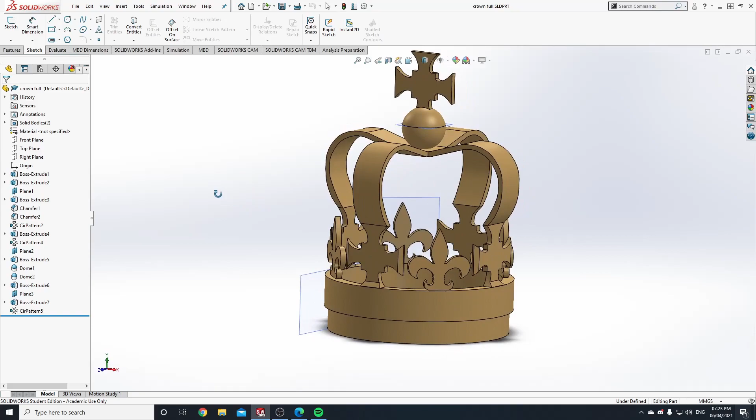What's happening, everybody? My name is DMan, and this is a Solidworks tutorial to show you how I made this model, which is my final big, impressive, if you will, 3D printed crown, and I'm going to show you how I make it in Solidworks.

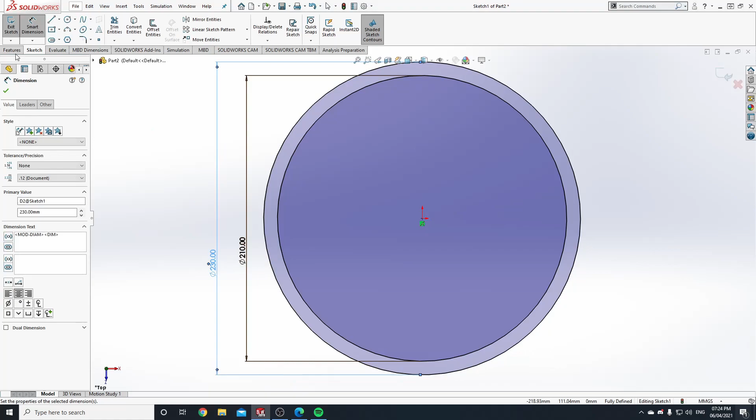I'm going to select another circle, and this one is 230 millimeters, and we're going to extrude that by 30 millimeters. So this is our first part of the crown.

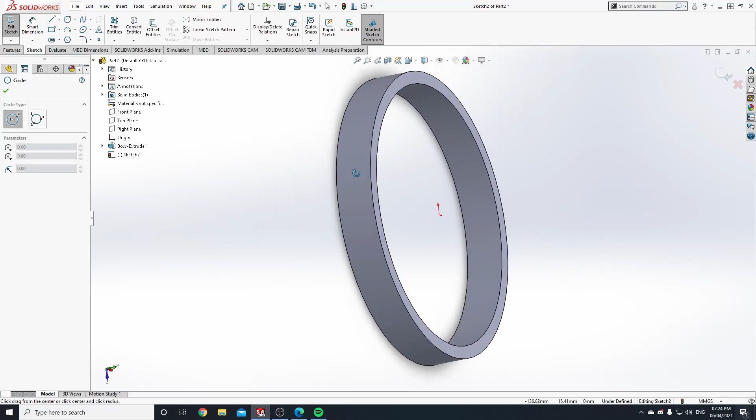It's the part where the fur attaches underneath the jewels. I'm going to go to the top of this, sketch, circle. Don't forget to select your plane. Make sure that you're selecting the top of the part so that it knows where to sketch.

You're going to bring it out to here so that it's the same diameter. You won't notice the difference. Bring it out a bit further. This one is 240 millimeters and extrude it by 40.

So this is the jewel band, the band above the fur that the jewel's attached to, and you can see that we kind of have a crown thing going on, if you will. So we're making good headway.

So obviously the crown has various bits above the headband, like the cross and the fleur-de-lis.

So we're going to start with the cross, and to make the cross, it's kind of right here, isn't it? So it's not easy to sketch.

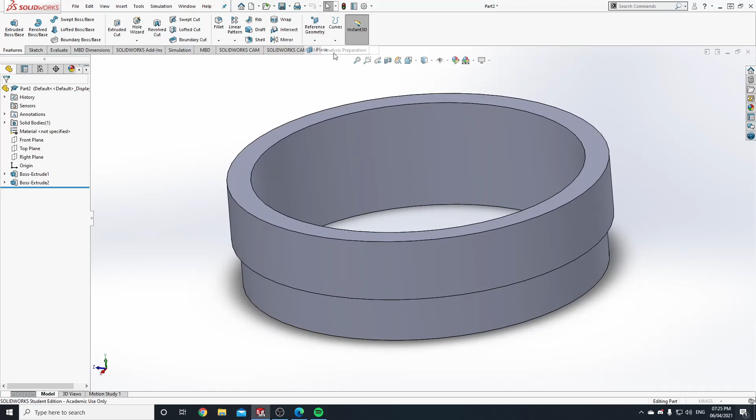I found the easiest way to do it was go up here and make yourself a new plane, tangential to the interior of the headband, and then just make it perpendicular to any of the planes. Because you have nothing sketched here, it doesn't really matter whereabouts you draw it, but once you have the plane done, we can go ahead and start sketching.

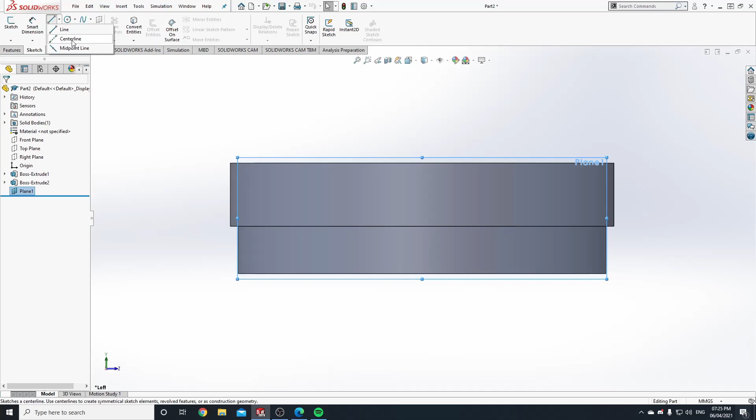I would start with a center line from the origin up, just to make sure that I'm perfectly perpendicular and everything else, and I know where my center of my crown is, of the cross, sorry.

Once I have a center line, I'm going to sketch a midpoint line where the center line intersects here. I'm going to make that 40 millimeters across.

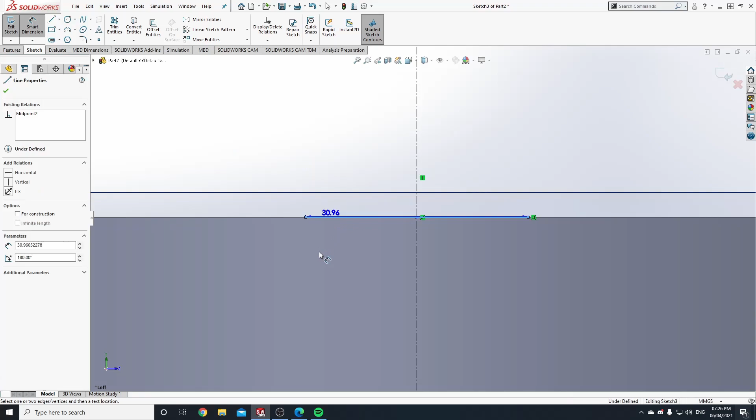And because that's shifted, I'm going to add a relation between this and the line. They're coincident. Lovely. So that's the bottom of the flared cross arm that we're going to use.

Now we're going to go up here, we're going to get a center rectangle, sketch that right about there. The cross you can really play about with.

I'm just using roughly the dimensions from my actual crown, round about this. It doesn't matter too much, but don't make the cross too tall because it does contribute quite a bit to the overall height, and if you make it a bit too big, the crown can look a bit too tall. I nearly made that mistake.

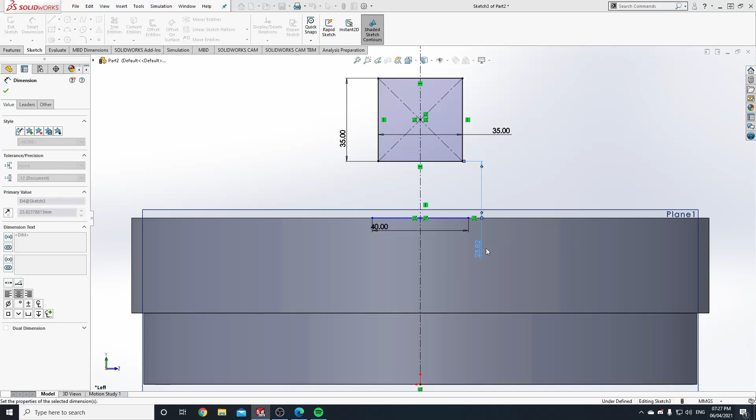I'm going to offset this by about 25, maybe 20. Yeah, okay, that's better. So now I'm going to take this thing up here called the spline tool.

I'm just going to take from here, I'm just going to draw up, round, up to there. So you can see we have that kind of flowing arc kind of shape.

And the spline tool is kind of cool. If you imagine it's a piece of wire defined by the points along it that we click. If you notice how each one does affect the ones around it. Not as visible here, but you can see that it is a connected line.

So we're going to just play about with the spline, get a shape that we're happy with. I want it to be a bit steeper here, a bit smoother. That's okay. Doesn't need to be perfect, but you want to try and make it nice and smooth.

Like if you leave it sitting like that, it's going to be painfully obvious that's not a perfect cross. Like I said, it doesn't need to be perfect, but it does need to be decent. So once you're pretty much happy with that, like that, we have half of our arm.

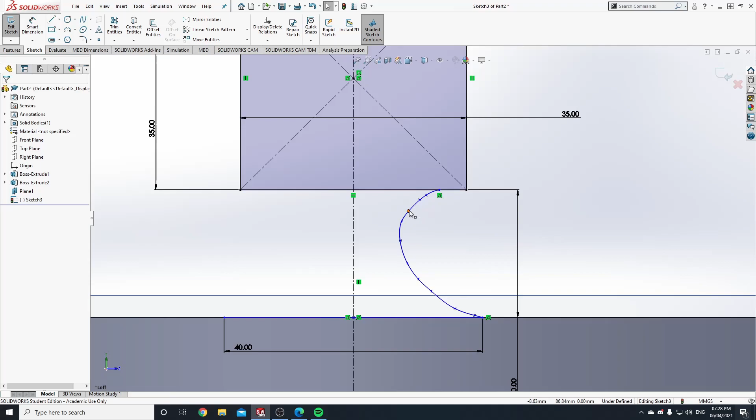And there's no point in trying to recreate it perfectly because humans, am I right? They're not very good at replication.

So what we're going to do is we'll go up here to our mirror entities button. We're going to select the spline that we just made, and we're going to flip it about the center line. So what that's done is it's perfectly flipped our half of our spline.

And now that it's done, I'm just going to trim entities here and here. So now we can see we have our fully defined sketch. But the problem is there's only one arm, isn't it? That is a fairly significant problem.

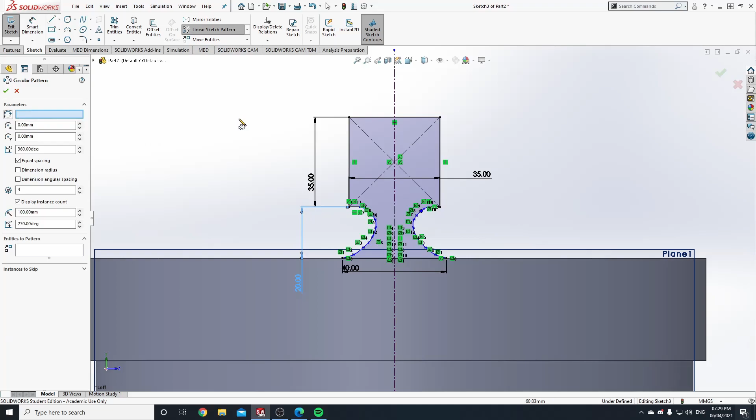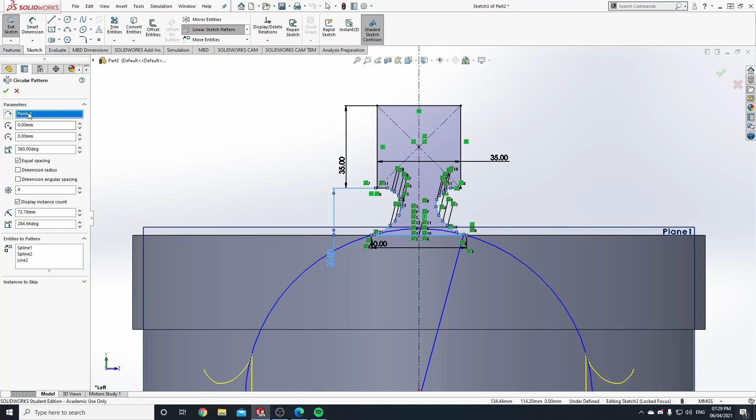So we're just going to go up here to where it says circular sketch pattern. Where it's looking for this, you're going to select the center point of the cross right there. Entities to pattern, you're going to select down here. You're going to select both splines and the line at the bottom. It never seems to enjoy selecting the right point, but once you get it done, you can see that we have all four of them perfectly there.

And these aren't colored in yet, so we're just going to trim entities to the edge. And there we go. It's not maybe exactly how I would draw it, but for the purposes of showing you how I did it, it'll do.

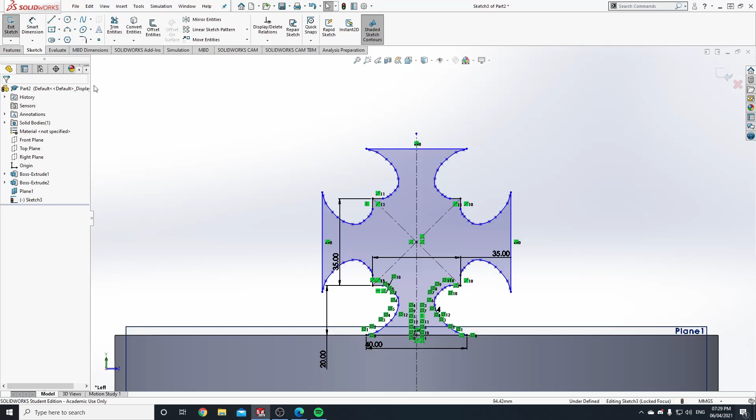We're going to extrude this by 7mm. I had to try and find a balance between something that was thin enough to look like metal and something thick enough that it would actually support the crown, because it is only 3D printed plastic. I found 7mm was okay. I was just kind of worried that 5mm would snap if it was handled too roughly. And 10 is obviously too thick.

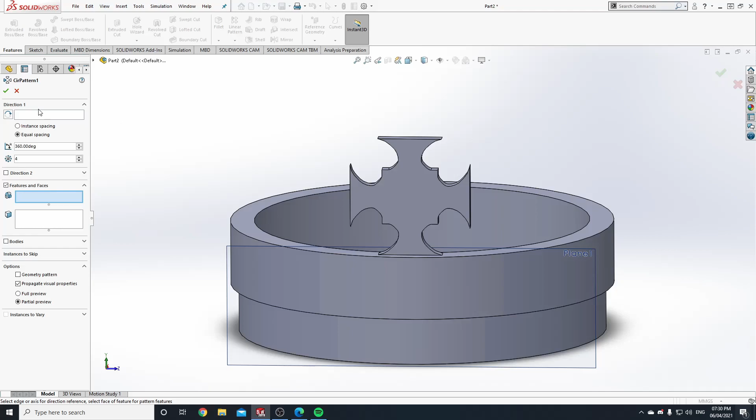So we got to the point where we have one cross, which is good, but obviously the crown has more than one. It has four. And like we did with our circular sketch pattern, we're going to go up here to where it says circular pattern under our features tab. We're going to select under the direction here, we're going to select the interior, but not the face itself, the vertex where the face meets the top. We're going to select our crown under features, make sure this is set to 4, 360 degrees, equal spacing, hit the tick. Look at that, job done.

We're going well, so we are. We're going well indeed.

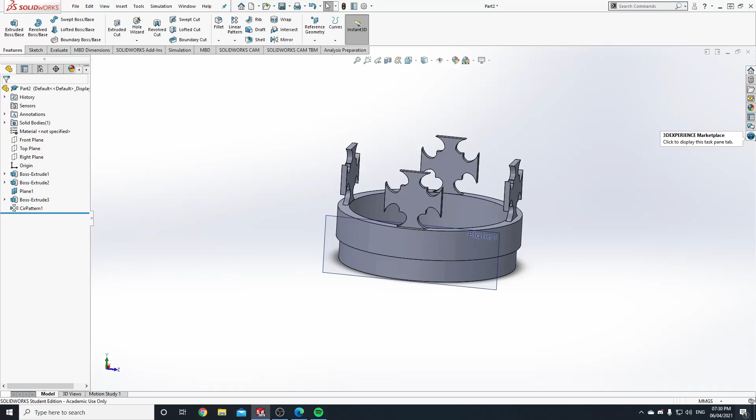So, next step I did was the tall, curvy arm type things. And to do this, I go on my right plane and I sketch. Obviously, it's quite a tricky shape to get right, and I kind of wanted to make it accurate.

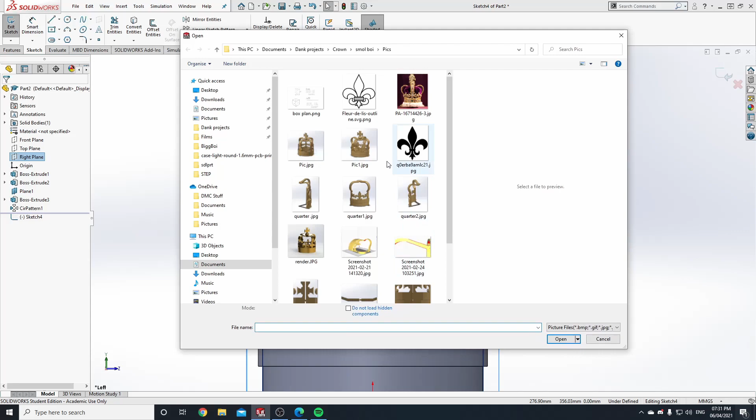So what I'm going to do is I'm going to go in here to where it says Sketch Tools, Sketch Picture, and I have a selection of images here of both completed crowns, 3D printings, whatever, fleur-de-lis. But this is the one that we want here. I just grabbed any picture, the crown will really do, because it's the same shape, you know what I mean?

So what this will do is it'll bring a picture in on the right plane, and we can then sketch on the picture as if it's not there, if that makes sense.

So we're going to take the picture in, and we're going to scale it down so that it's approximately the right size, roughly the same size as the crown, you know, something like that. Maybe set that right to there, maybe a little bit bigger, right about there. So you can see that's roughly right.

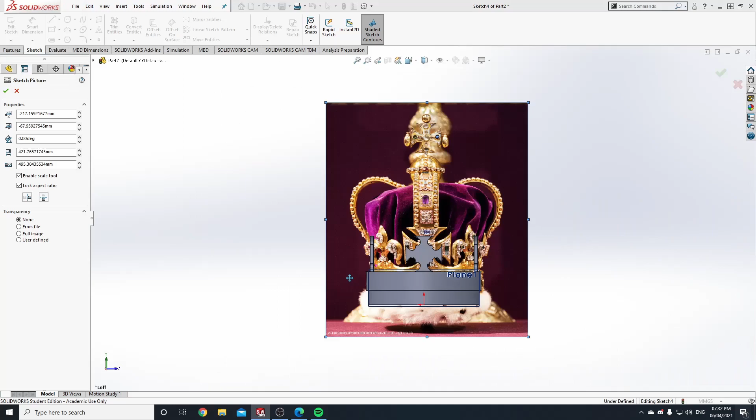Obviously your crown won't be 100% exactly the same as this one, so I'm just going to move this over here. So it's right about where the cross on the picture here meets the arm up here. So I'm just going to set that to there. Hit the tick. So now this is stuck.

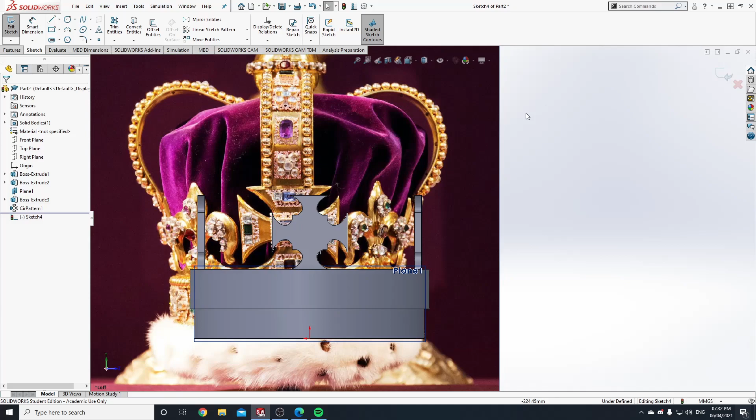What we're going to do is we're going to take our spline and we're going to start sketching from this point here. You're just going to go along here with your spline. Roughly, I found this, the center of the balls, was a good place to latch onto and create the spline. Right about there is okay.

Now we're going to go back down here, we're going to do the same again for the other side. Just bring it right up, try and keep it roughly equidistant from the other line.

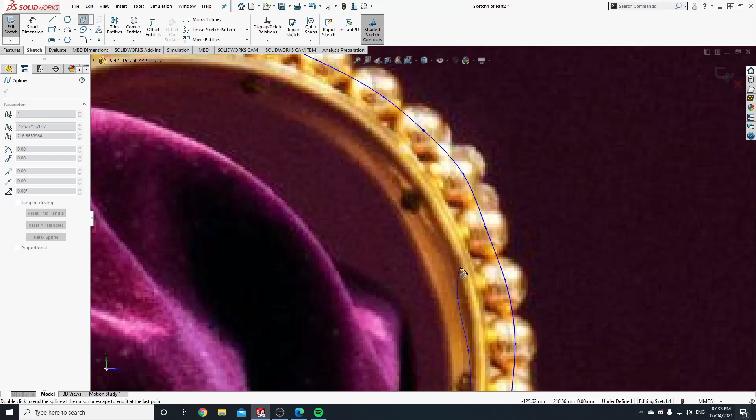If you get to a tricky place with a spline, as we'll see later in the fleur-de-lis, the trick is just to add a lot more defining points to stop it from misbehaving. Because you can always drag them around later and keep up with them.

So once you have it roughly where you want it, like that's obviously not going to be perfect. You know, this is also like the cross. It doesn't need to be perfect, but you're trying to pretend that it's a bent piece of metal.

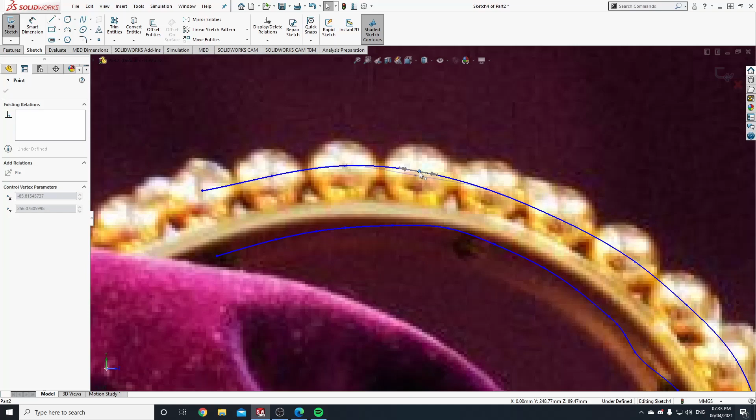Okay, so you do want it to be smooth, flowing, no sharp changes. And even just moving it around like this, I find was really helpful to make it, I mean, look at that, really helpful to make it seem more natural. You don't want to make it look like it's done by a computer. You want someone to look at it and think that it is actually metal.

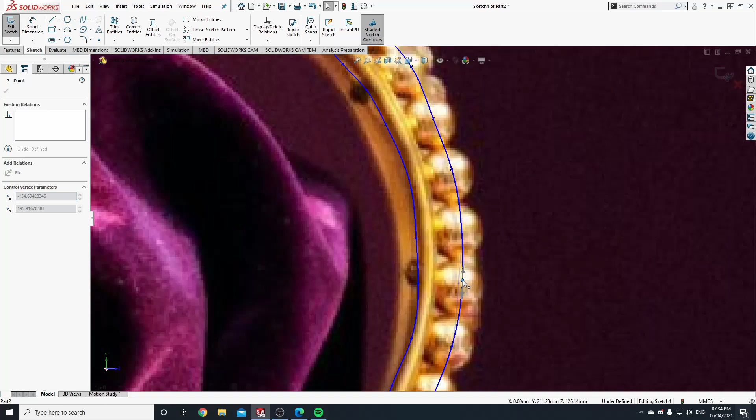Difficult perhaps, but that's the challenge, isn't it? So once you're pretty much happy with your spline, as I nearly am - look at that, that's not good enough. So now we have this, too big.

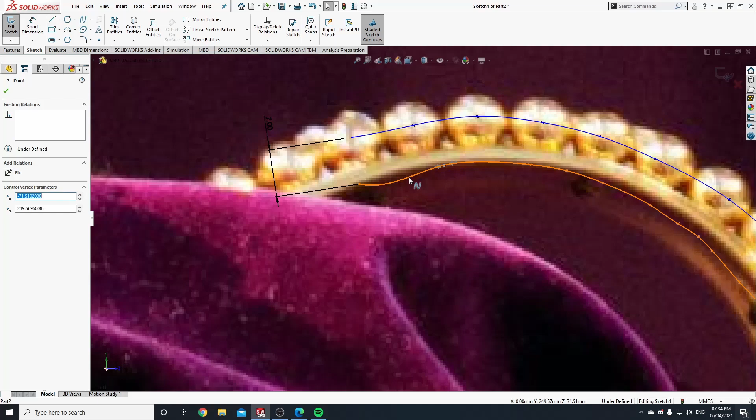This is where it does get kind of tricky. You do have this thing here, but you want this to be 7mm as well, so we're going to define that as 7mm. Drag that down - no, no, we're going to drag this down a little bit, to right about there. Now what you want to do is make sure it hasn't affected your spline too much. It shouldn't really, but try and keep it roughly the same distance apart.

I'm sure there's a more official way of doing it, sort of like an extrude and a revolve, where you can sketch the rectangle up here and then make it follow a contour down into the cross. This is the way I did it - I found it was pretty easy, so hopefully you do too.

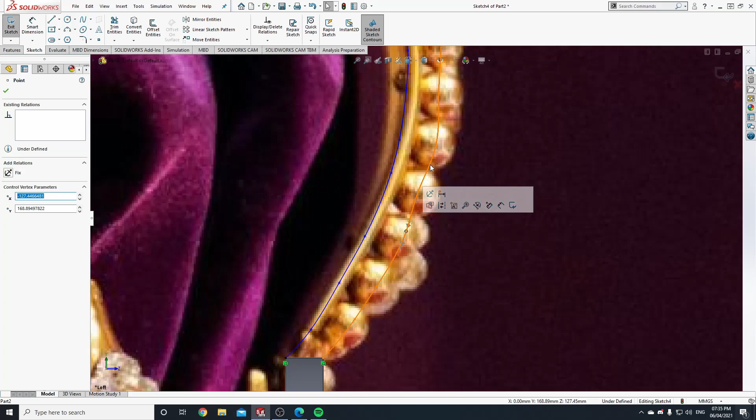Once you're pretty much happy with it like that - oh, that's too flat. Once you're pretty much happy with it, like that for example, we've only gotten to here. So what we need to do is take our straight line tool and go down like this. This is where it gets kind of tricky.

Because it's a crown, people do tend to look quite closely, so you want to try and get this part right if possible. Round about there - so what this is, is the arm that goes underneath here, but we obviously can't see because there's something else in the way.

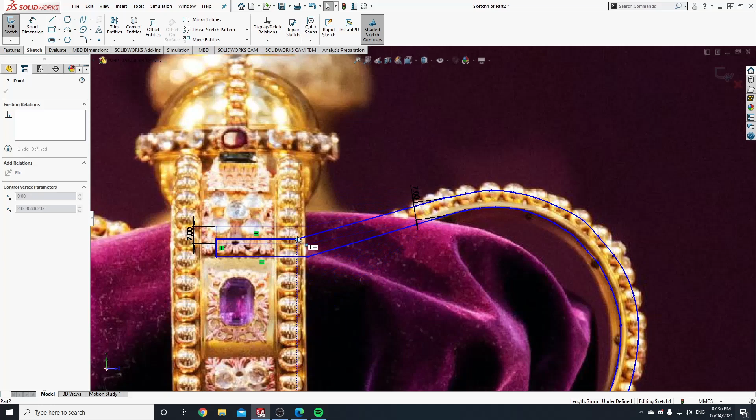So what I just do is normally something like this, and then once it's finished I can make it a bit longer. Usually right about to there, so that when we do our circular pattern you'll see that they'll all overlap and just make a solid object. You can move this up and down to figure out whereabouts you want it to go. I think right about there is okay.

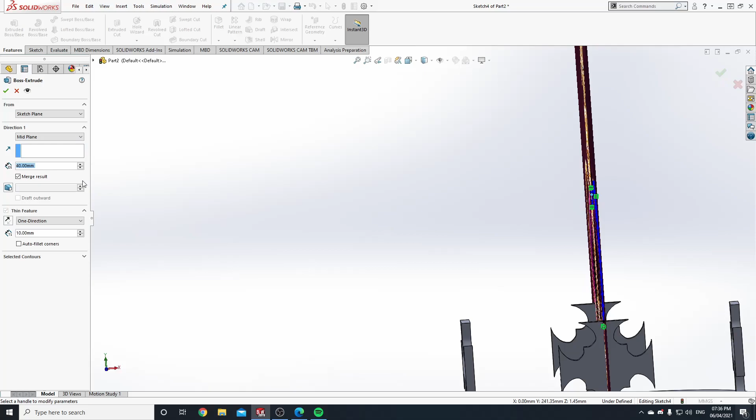So now you see we have this little profile. What we're going to want to do is go up to here to extrude. But the problem is this is in the center, so we're going to go from blind to mid plane and set this to 40 so it's the same distance as our other side.

I know the problem - it's very important to remember to close your sketch before you extrude it.

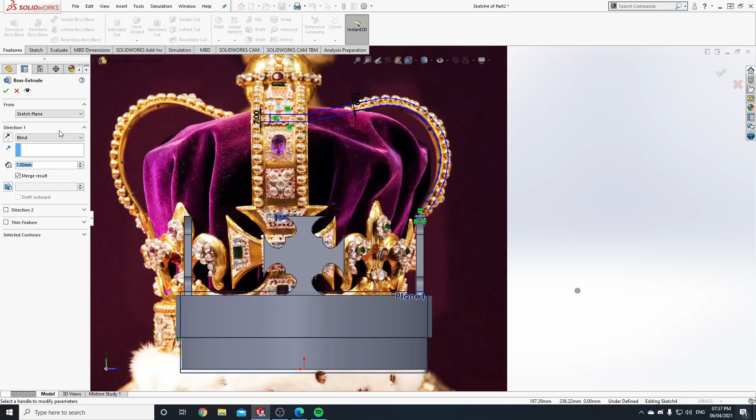So now we're going to extrude it 40mm, mid plane. And now you see we have this lovely crown-esque band up here, and you can see how it attaches perfectly, and you can also see how the points define - you can see where the points are changing quite visibly.

I probably wouldn't be quite happy with this if I was making the crown again, but like I said, it'll do for now.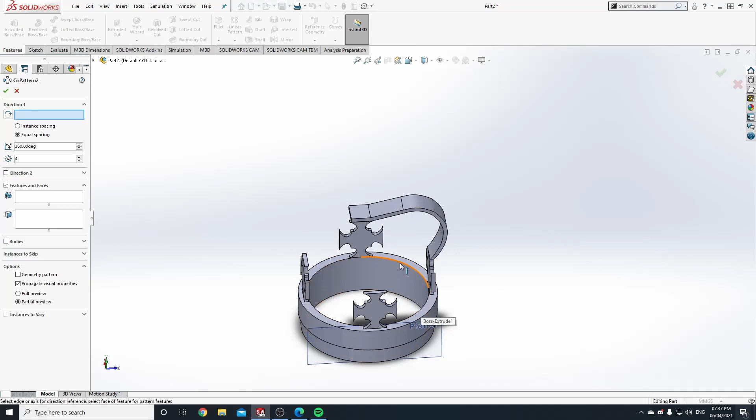Like last time, circular pattern. We're going to go ahead and select the interior - nope, we do not want to select that. Exterior one will probably be okay for now. Select this - job done, look at that.

So obviously there's something not quite right up here, and what this is - this side's flat part is coming out and it's coming into this side of the arm.

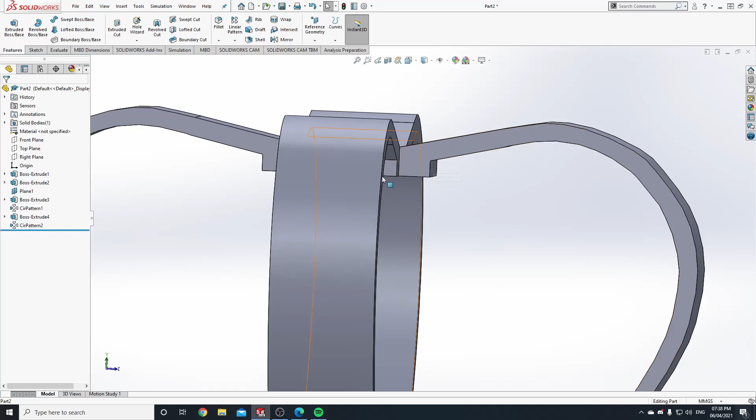So what we can do to fix that is go into our sketch and simply drag that back to right about there. And you can see we're nearly there. I know it's not quite exactly a perfect way to do it, but it works for the most part.

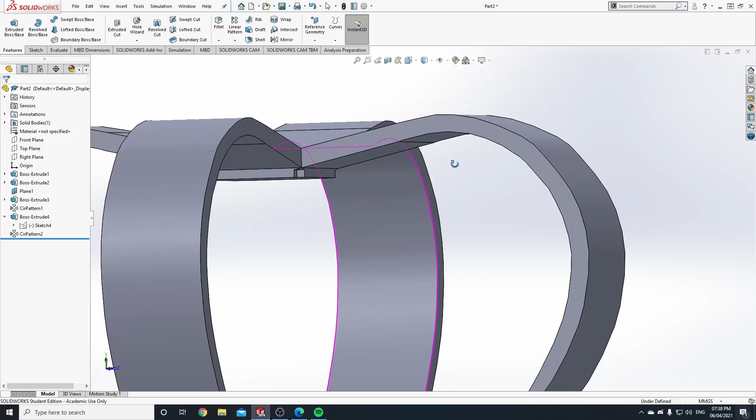So you will have this thicker section in the centers, and it's not going to be perfect perhaps, but perfection would be nice. So I'm going to try and see what that's like.

You should really never go any further past the halfway mark, because obviously you're going to get a hole in the center, like that. That's not what you want.

The main problem with this, I can see already, is that the top section here is too small. So we're going to go into our sketch and I'm just going to fix this up.

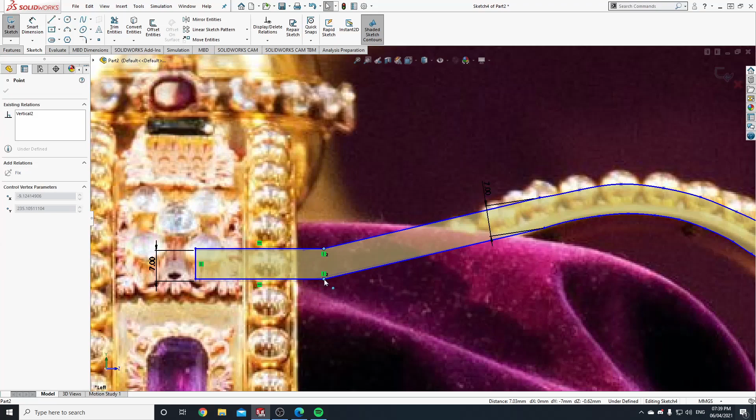Just add a relation so that that and that are vertical - that's nice and defined. Let's drag these back. Lovely. So you can see that's decent enough. There's a tiny, tiny overlap here, but nothing that would really affect the decency of the crown.

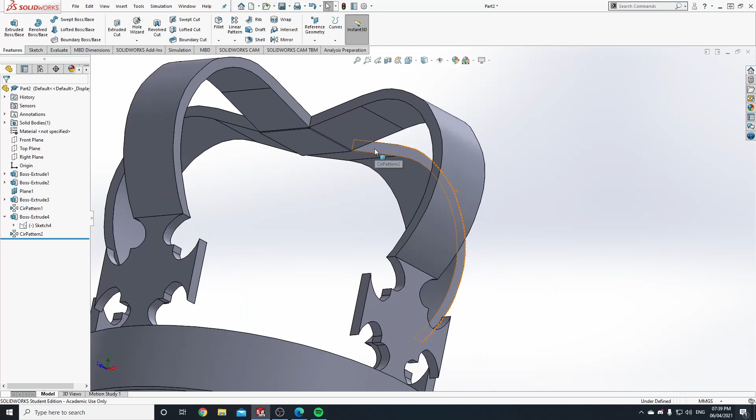When you might be making this crown, it will pay off to go in here, spend more time making sure that this is not too far over, not too far back, that the flat section up here isn't too long or too short. There is a sweet spot. It's hard to find, but it is there. You can get it perfectly flat. I mean, it's not too tricky.

So as you can see, we're nearly there. We're only missing the topper and the fleur-de-lis. So we'll do the fleur-de-lis next. I'm going to go to reference geometry. I'm going to select this. I'm going to select this. And this is crucial up here. You're going to want to go up to this and change this to 45 degrees.

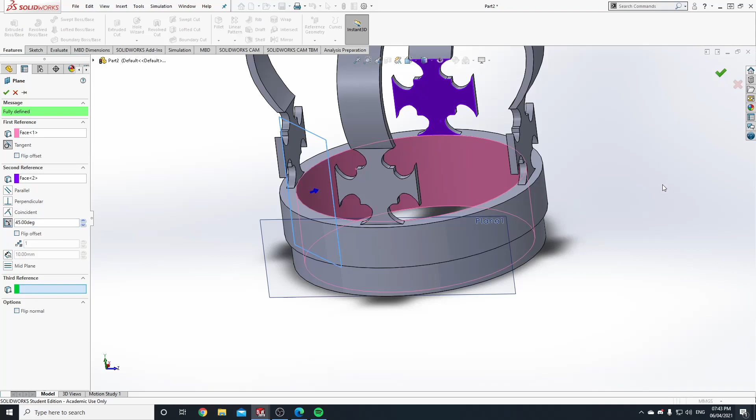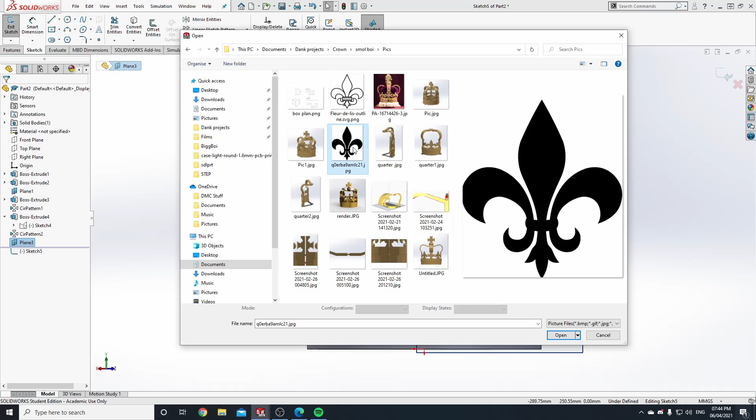So we're going to go ahead and do another sketch on here. And like last time, we're going to bring in our sketch tool. We're going to go to sketch picture. This time I went for a fleur-de-lis. Which one? This one, I think. Let's bring this out. So that's down there. I'm just going to leave that there for now.

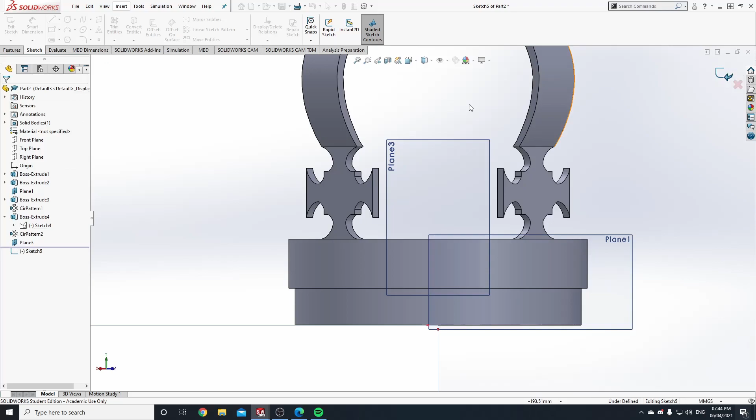Put up a center line from here. Just so again, so that we know what we're dealing with. Oh dear. Let's rotate this quickly. There we go. So again, we're just going to take this, scale it down. Okay, that's obviously too big. Right about there, maybe? That looks okay.

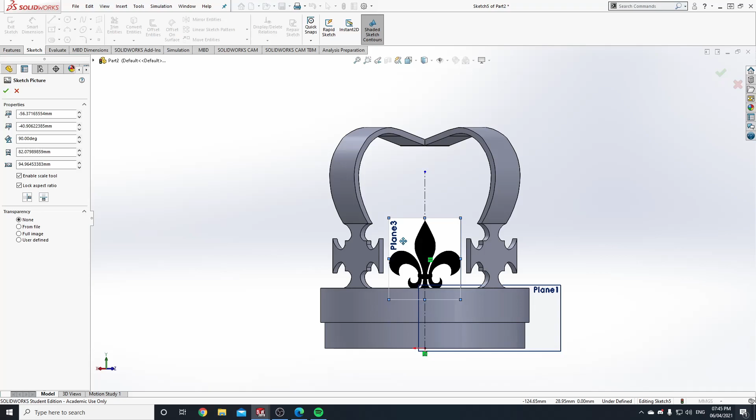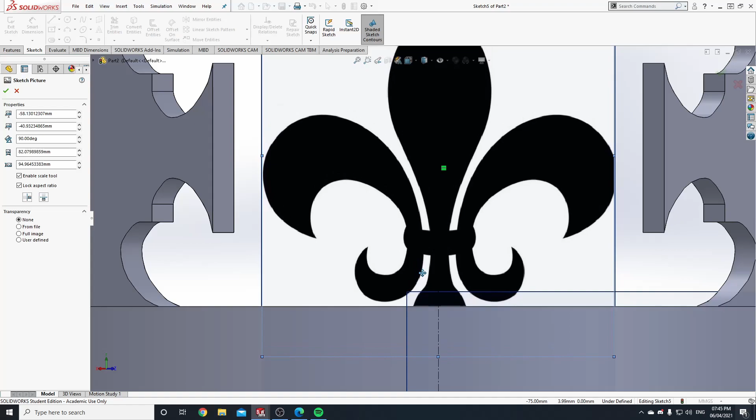Position the fleur-de-lis as you would like to see it in your crown, but remember, look at this. You're going to want to keep that right there. Just zoom in and look at the pixels. Look at that. That's centered enough. Take the fleur-de-lis. Obviously you don't want to sketch on it like this, so you're going to want to sink it down a little bit into the part. Right about there, I think will be okay. We just check our center line. Lovely. That's pretty much okay, so we'll hit the tick.

Now we're going to get our spline again. We're basically just going to outline this thing in the spline. However, obviously we're not going to go all the way down here. So we're going to cut it over there, and we're going to leave this whole part down here solid. So let's see what that looks like.

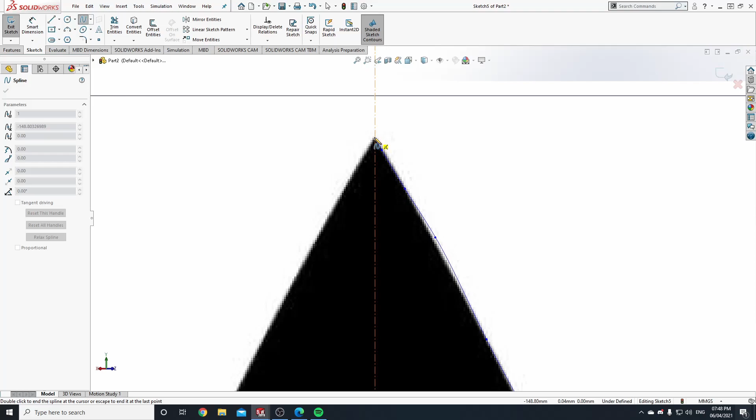Okay, so just like the cross, I've sketched out half of the fleur-de-lis, and you can see I've put a little bar across here to help add integrity if it gets printed. And just like last time, we're going to go ahead and mirror our entities around, just like that line, that line, that line, and that line. Mirror about the center. Job done.

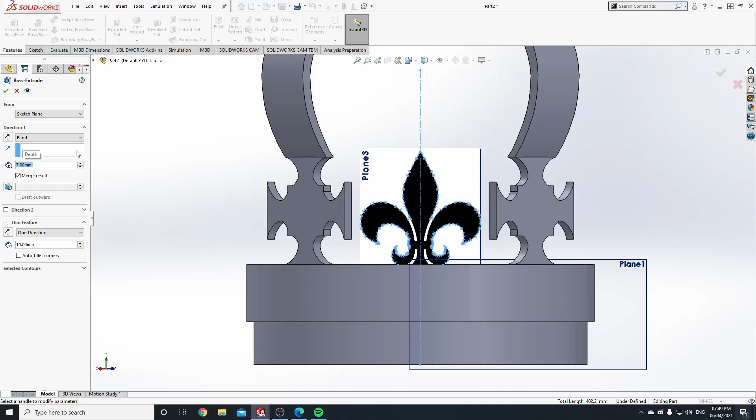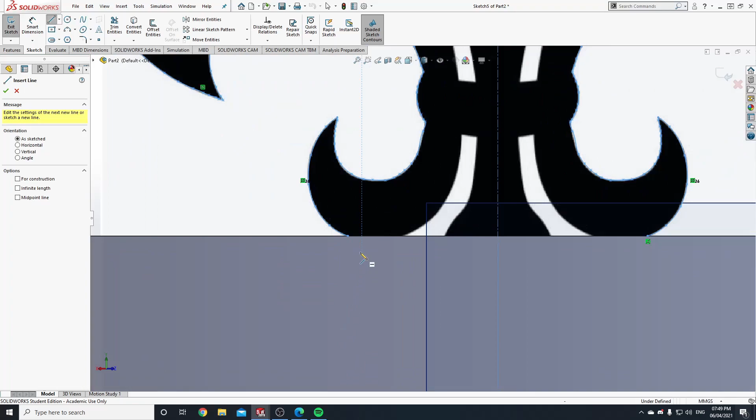A lot of entities. So now we have that, we can just go up to our features, extrude that by 7 millimeters. Let me just make sure it's going in the right direction. Oh. If you get this rebuild error, again, you need to go back, make sure that your sketch is fully defined, because most likely it will be where it meets the other parts that I always forget to define. Make sure it's closed. Yeah, that's going the wrong way, so flip that.

So there we have a lovely little fleur-de-lis. Pretty nice. And again, we're just going to go circular pattern. Click that. Job done. So now you can see it's really starting to look like a crown. It's looking busy, it's looking excited, but there's something missing. The topper. In the real crown here, as you can see, we have this lovely little topper up here.

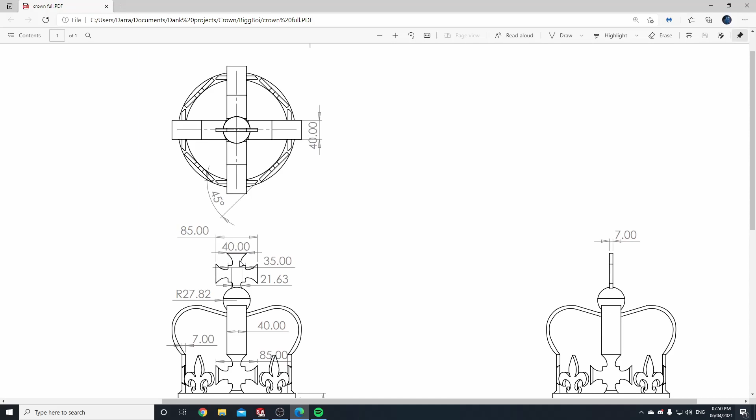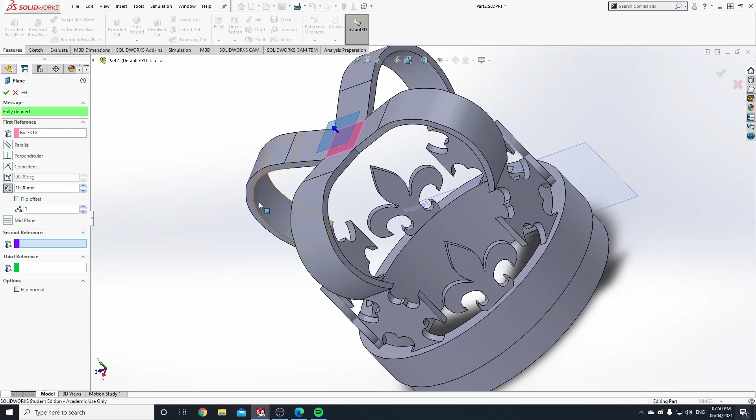So we're going to go ahead and sketch that. Oh. Save that. Always remember to save your parts, folks. So to sketch the topper, I'm going to go on here. I'm just going to sketch a... What I'm actually going to do, I'm going to change things up a bit. I'm going to create an offset plane from here. 10 millimeters offset. And you'll see why I'm doing this in a second.

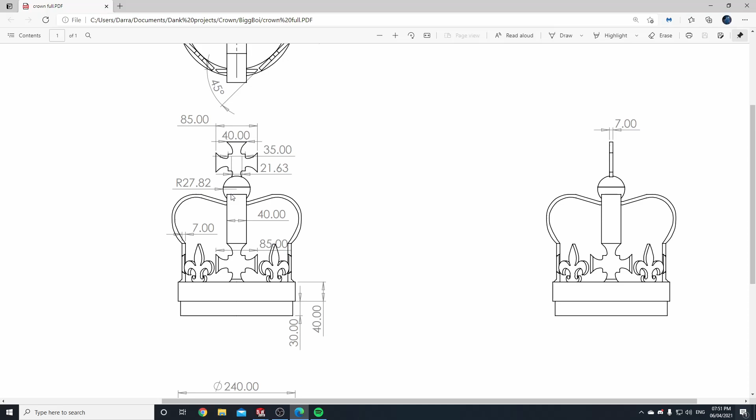Basically, the sphere on the topper isn't actually a perfect sphere. If you look at these plans that I have for my crown, you can see this little line here. And that's basically because there's two different hemispheres put together. And that's because a perfect sphere looks weird. So what I wanted to create was kind of like a sphere that had been sat on, basically.

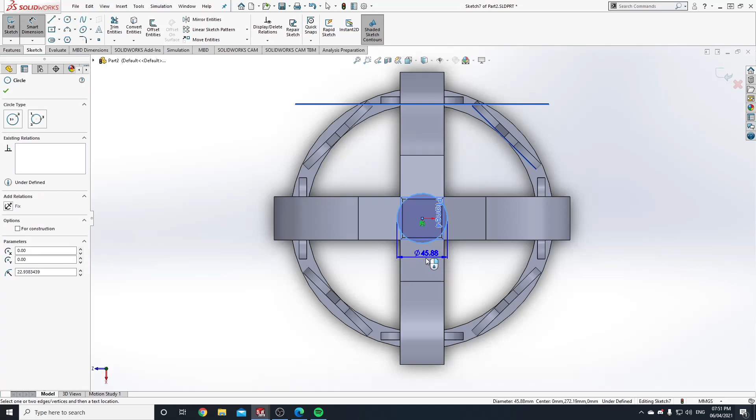So what I'm going to do here isn't quite the right thing to do, but you know, yeah. Oh, see, like that sketch. We want to make sure that we're sketching on this plane. Right about there. For this particular one, yeah, about 40 millimeters maybe. Yeah.

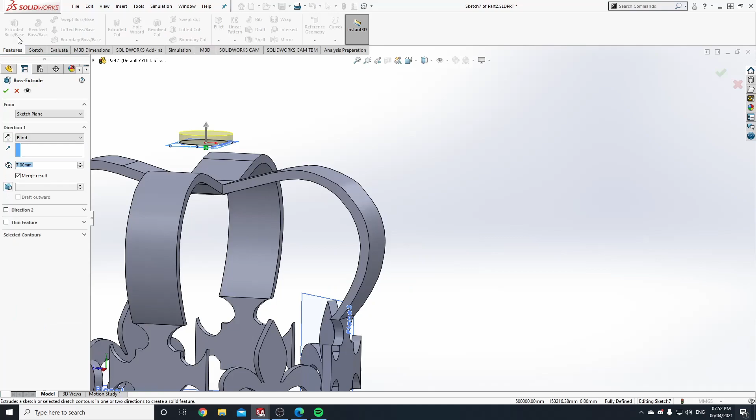Now we're going to insert features. No, that's right. So it doesn't let you create a dome unless there's something to create it on top of. So what I kind of do is extrude it by 0.01 millimeters. So this wafer thin piece that isn't really going to affect us. And we're just going to go to insert features, dome.

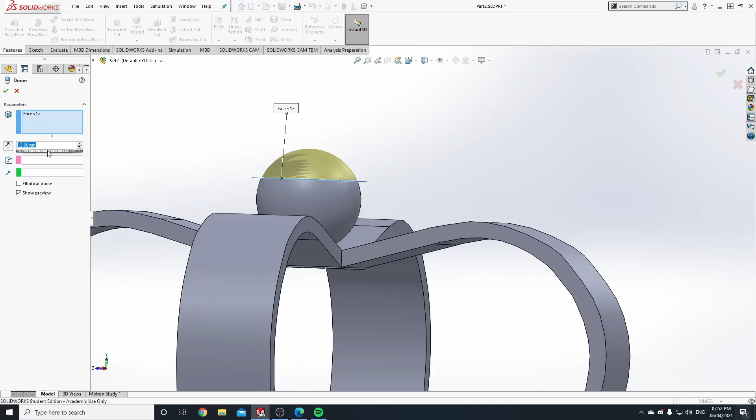This bottom one is around about 30. No, go to 27. And we're going to go up here and we're going to insert features, dome. And this one needs to be about 10. 15. Too tall. 13. 12. So you can see there we have a ball. It's not a perfect ball, but it is indeed a ball.

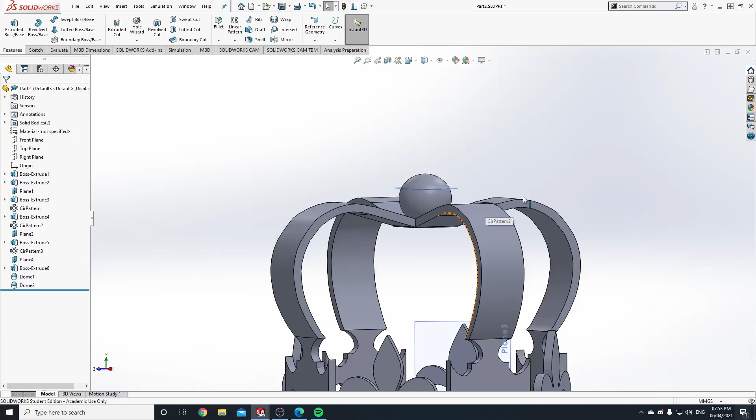And you might notice that it's sitting quite proud. In fact, it's very dodgily attached to the crown. So what we can do there is we can go into our plane, we can edit that and say 25. And that'll just sink the whole ball down into the crown. So that's good. But again, in the real crown, we have this nice little cross up the top. And you might be thinking, oh dear, now I have to create an entirely new cross. But no, it is not so.

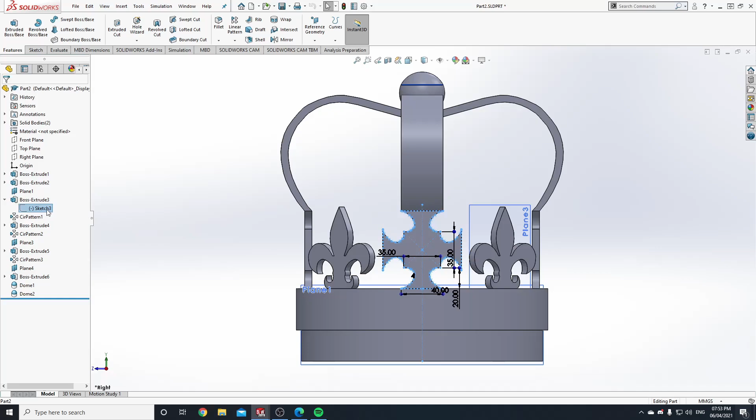For if we go here and we open our tree and we see the sketch for our original cross, Control C that. Okay, bear with me here. Bear with me. There is sense in the madness. We're going to sketch on the right plane. Paste. So there we have our entire cross sketch. And CAD Masters, look away now. What you're going to want to do, this is the problem with dragging things around. It doesn't enjoy it.

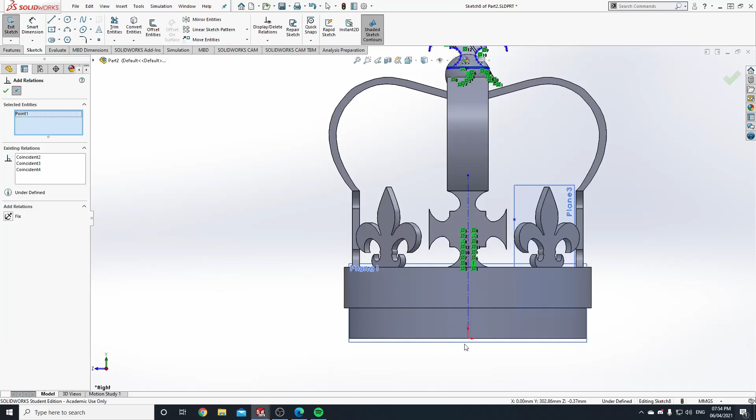You're going to want to line it up so that it's above, and just grab it and sink it down into the sphere. Right about there should be okay. If you want to get it perfectly centered, you're going to want to select this one, add relation, origin, vertical. Yes. Make sure that your sketch hasn't completely disintegrated when you did that. But now that means that it's defined along the up and down axis. Definitions for sketches are a good idea.

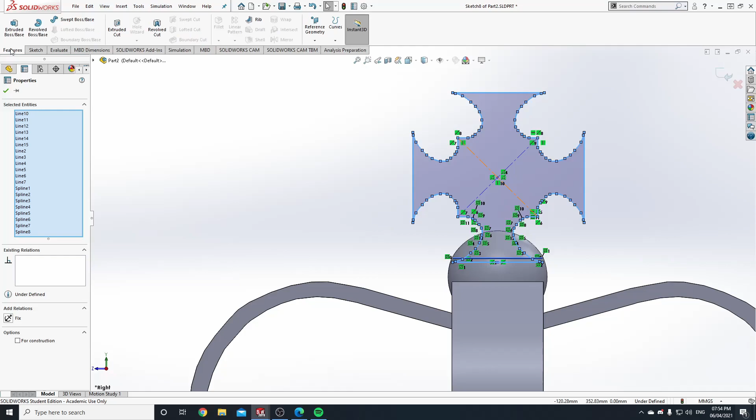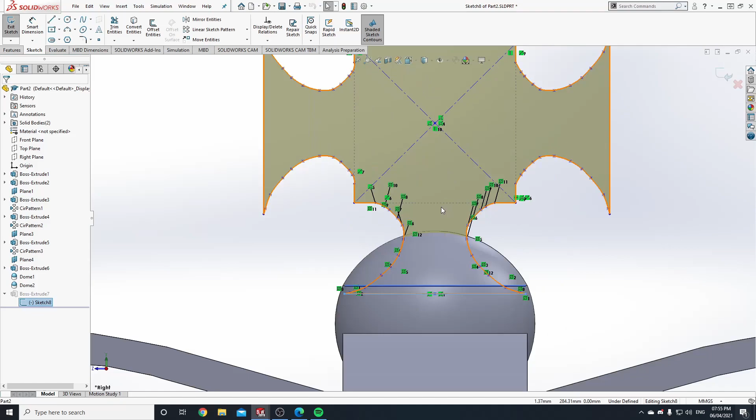I'm going to leave that there and extrude it by 7mm mid-plane so that it's centered. So now we have this. Not a big fan. Let's go back into it and change that. I'm actually going to bring it up a little bit. I want to see a little bit more. But then we have these starting to poke out. So what we can just do is just sort of, kind of like, and because it's mirrored, it'll update the other one automatically. So you can see there we have like a sort of flowing into the ball kind of thing going on. Finish that. That looks much better.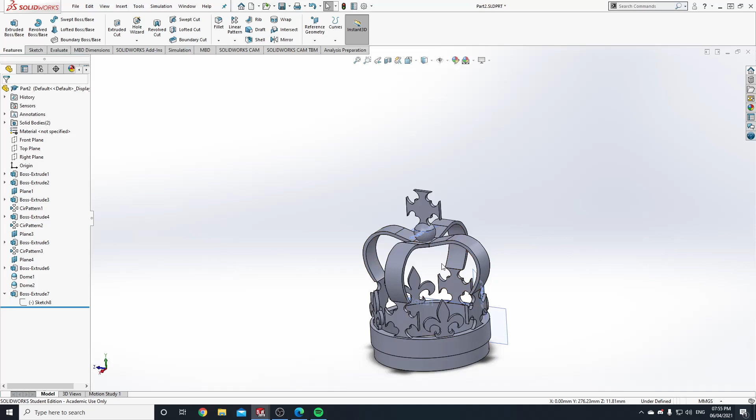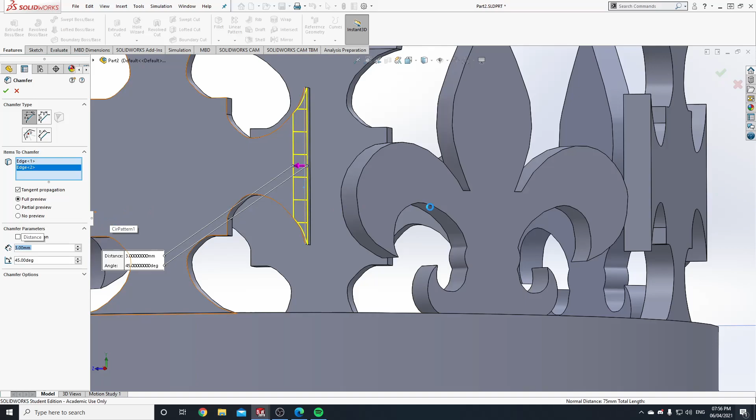So there we have pretty much our finished crown, and you could print this and it would look pretty good, but there are some small features that we can add now to make it look even better. Mainly filleting. So what we're going to do is we're going to come down here and we're going to do a chamfer actually. I'm going to select that and that. Obviously those chamfers are far too intense. 5mm. Still a bit intense. 3. Yeah, okay, 3. You can see that we have like a nice sort of effect going on. Nah, 3 isn't even enough now. Indecisiveness, question mark? What is that?

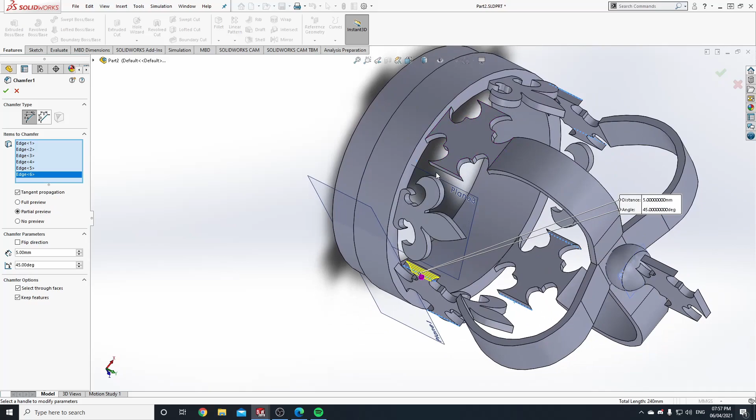So you see we have that sort of effect, that chamfer on the thing. We can circular pattern the chamfer itself now. So that'll affect all of them at the same time. Hello? Okay, it doesn't like that. Alternatively, you can just go into your chamfer and select all the edges at the same time. And that'll do the same job. In fact, it'll save you an item on your tree.

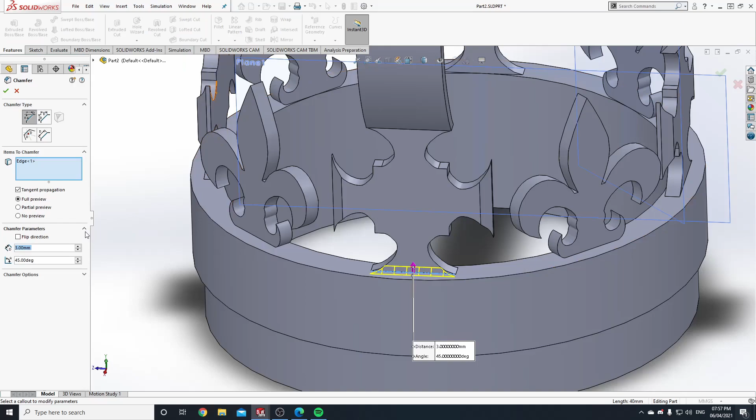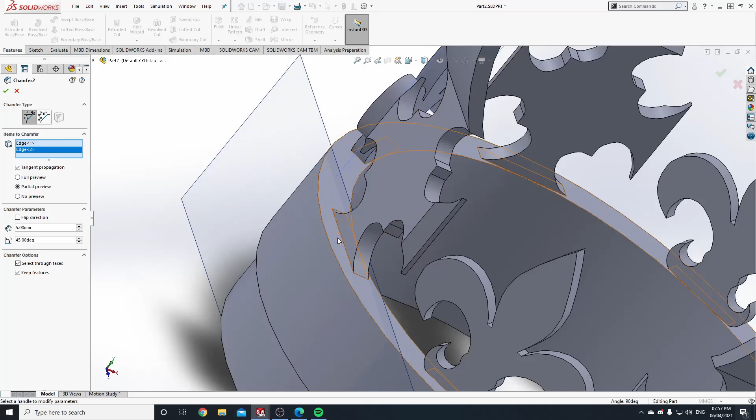And personally I like doing the same thing down here. Chamfering down here, not only does it make it look a bit nicer, I find that it actually does provide a bit of strength to the cross, and it helps reinforce it. So you can see that looks quite solid. It looks, yes, I'm not going anywhere. And once again, we're just going to make sure that we have the vertex where the cross and the headband meet.

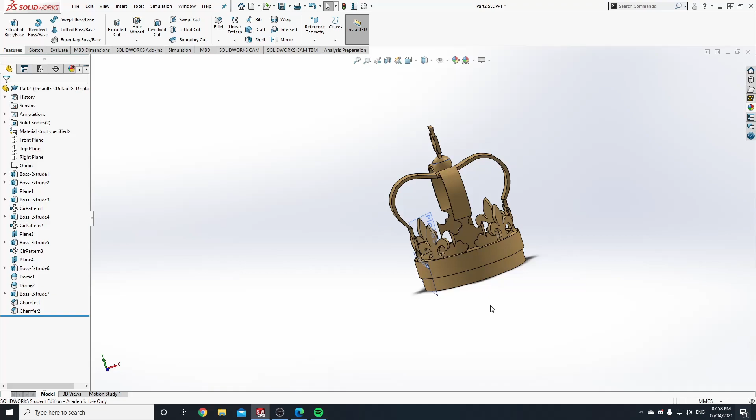So now we have a crown modelled. There's only one thing left to do. Appearances, metal, gold, add it to the entire thing would be nice. And there you have it. That is your completed CAD model. You can then slice this into sections and print it out. I sliced mine into 4 or 8, depending on which crown you're talking about. And I also exported the topper as a separate file, just so that it would be easier to print, because, you know. I'm sure you know yourself.